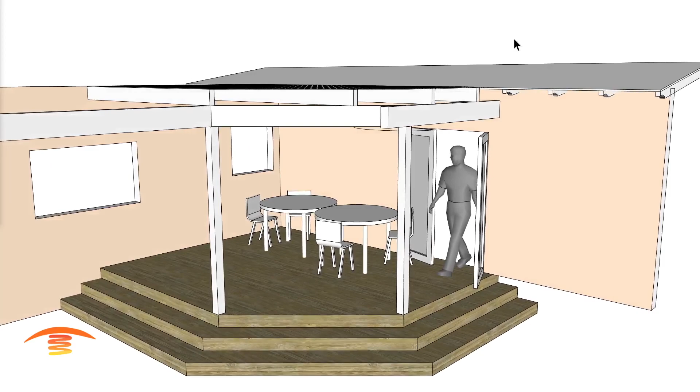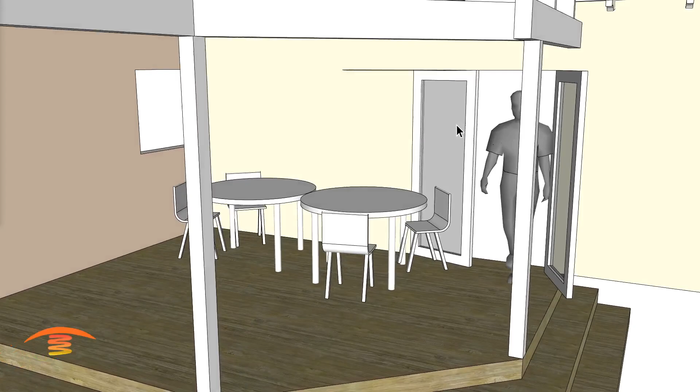So here we have a residential application. It's a raised deck patio. You can see they have some lattice work up here, and I don't see any issues with fans or anything of that nature. The only issue I see would be the doorway here, so I'm going to take the lattice off for a moment.

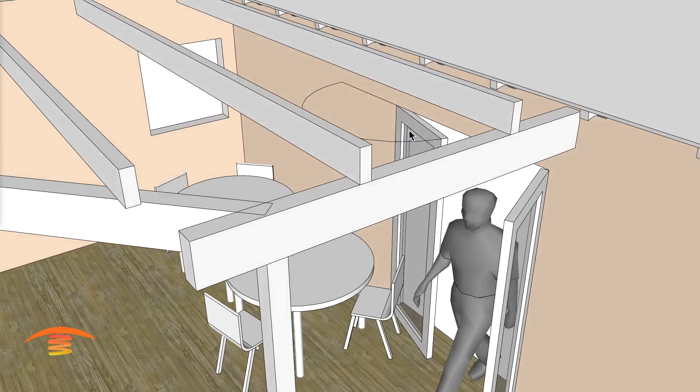You can see this doorway has the potential of opening up all the way. Now, I'm assuming this customer is not using this side of the door very often because of the setup here, but we still need to take that into consideration and use it as a guide. So I'm going to put the lattice back on.

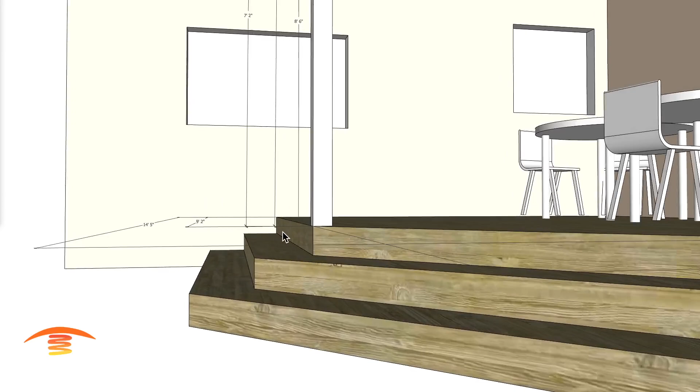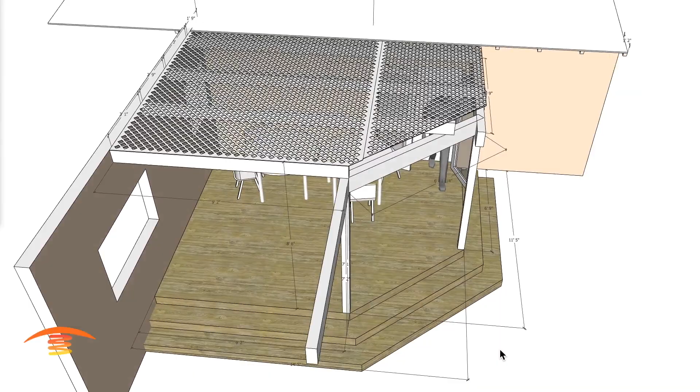Let's look at the dimensions of the patio. From the top portion of the deck there are a few different measurements, all going from that top edge. We have 7.2 to the lower beam, 7.11 to the top of that beam, 8.6 to the top of these cross members, and several other measurements, 9.2 over here. Overall dimensions are 14.5 and 11.5 in this direction.

We're going to cut off that measurement to determine how many units are needed. They also gave me some specifics about the beams coming across here, so you can see that.

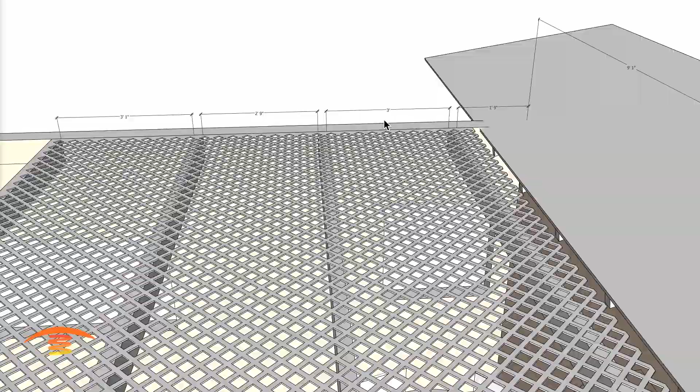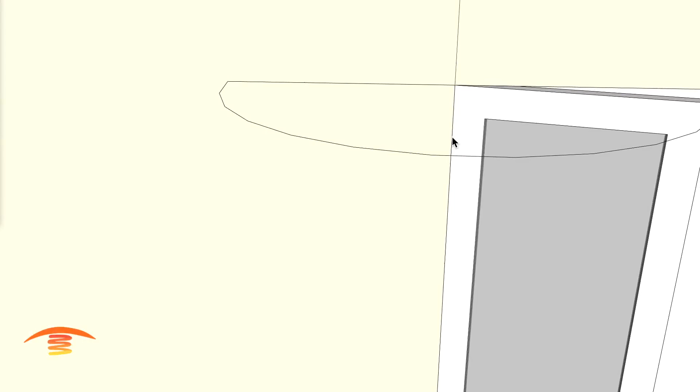This is what I have at the door, so this is going to be an important number for the customer to look at. I have 9 feet 1 inch to the trim of the door here, or actually this would be the hinge point of the door, so that should be enough.

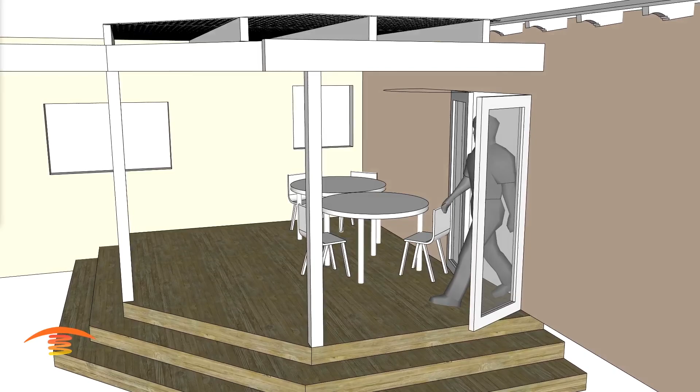Let me turn that off and look at what we could do. There are a couple of different heater plans here. This would be a Slimline 4,000 watt unit, and you can see I have it placed up here on the lattice. Now it's actually an inch lower, so what you'd do is take some tubular steel, mount it on this side, stretch it over to this side, and get a mounting position for that heater.

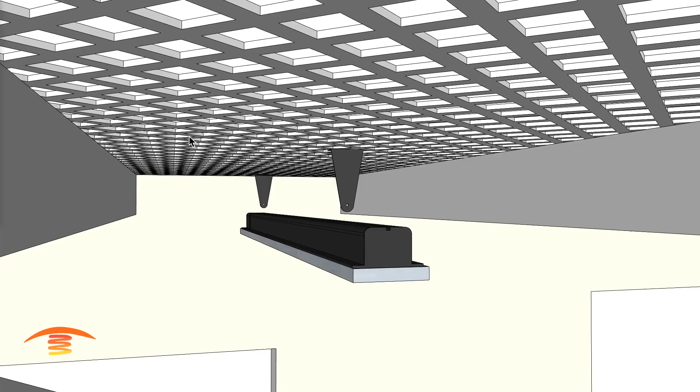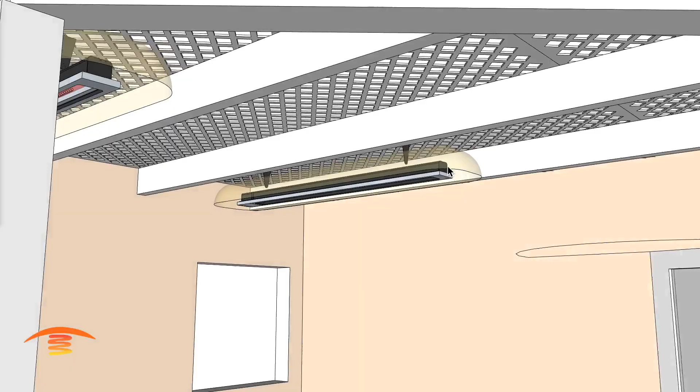If we look at the clearances above the heater, no problem there. We meet the clearances to this edge and this edge. The heaters are physically below this beam here, so everything else looks good.

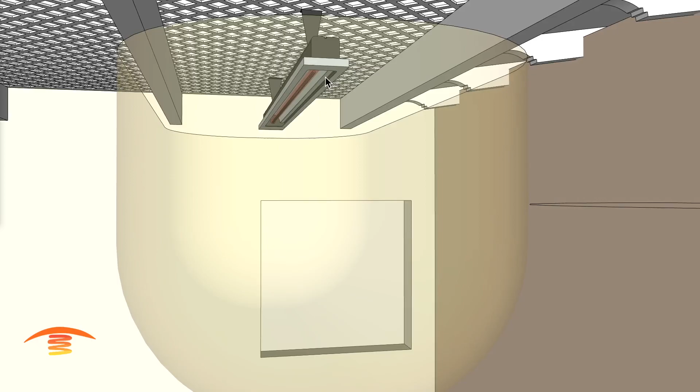Now the other clearance we're concerned about is the clearance below. With the position I have this heater, I'm meeting the clearance to this edge. I'm not sure if I have the dimensions to that specific spot, let me check... and I don't, so let me just add that in here real quick.

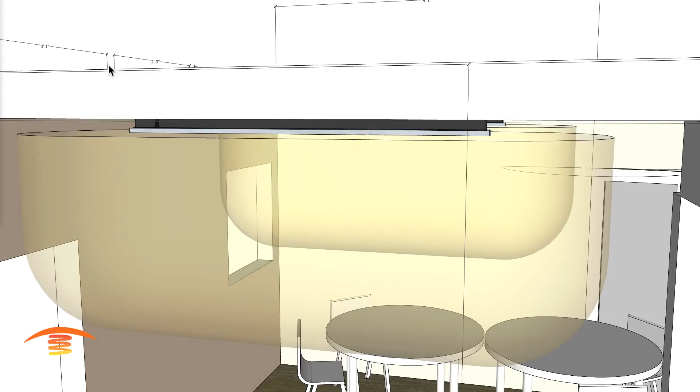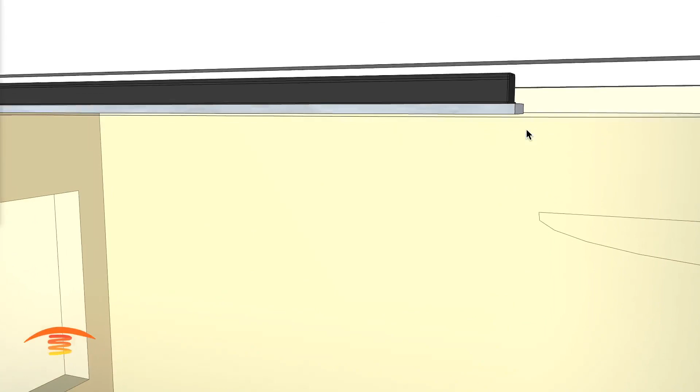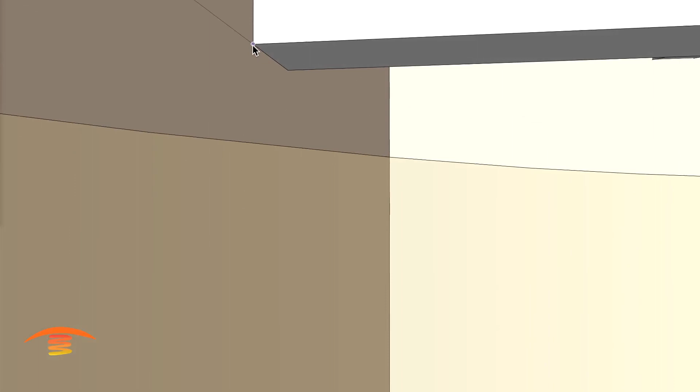So to that position, to the edge, let me key that in here. We'll tap right there and bring it over to the edge, or we could use this point right here and see what we get overall. Overall would be 6 feet 10 and a half inches. So with that, and the door measurement of 9 feet 1 inch still being true, there should be no issues with the clearance.

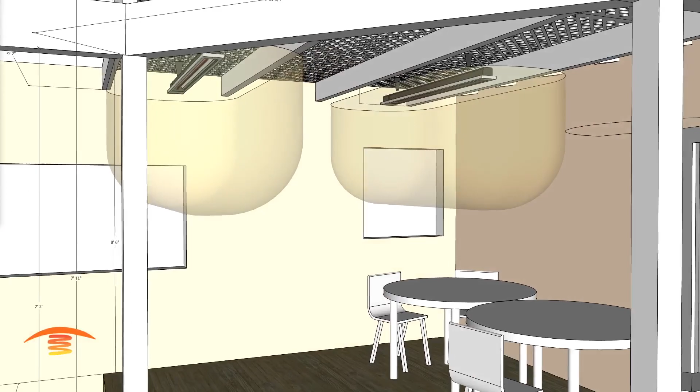If that is not true, you'll have to go to the second option I'll show you in a minute. In any case, basically there's two 4,000 watt units, and let's look at the footprint of the array.

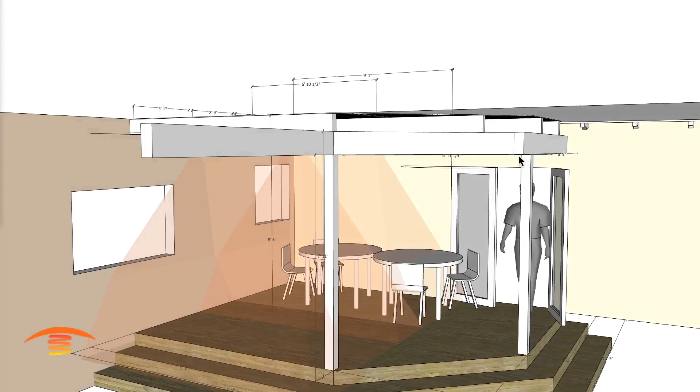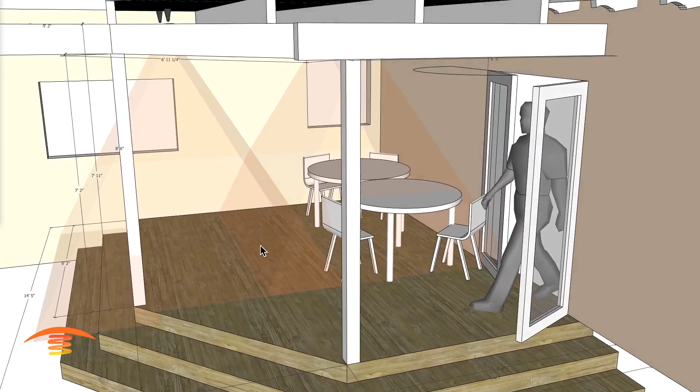I'm going to turn off the clearances here. So the footprint of the array covers this whole portion of the patio, but I'm not able to heat this section at all. If you're sitting in this chair, you won't receive the heat. This other chair is also questionable, so you'd have to change the seating pattern to stay warm on colder afternoons. But I think this customer has plenty of room to do that, so I'll leave it at that.

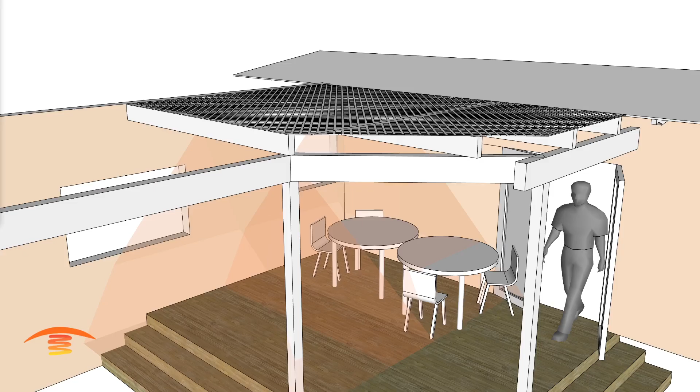Now, if that clearance or the 9 foot 1 inch dimension I mentioned wasn't correct, you could also go with an SL24 model. The SL24 is a smaller unit and will give you plenty of clearance. I have it all the way up to that edge, that same point, so I have more than 18 inches of clearance back here.

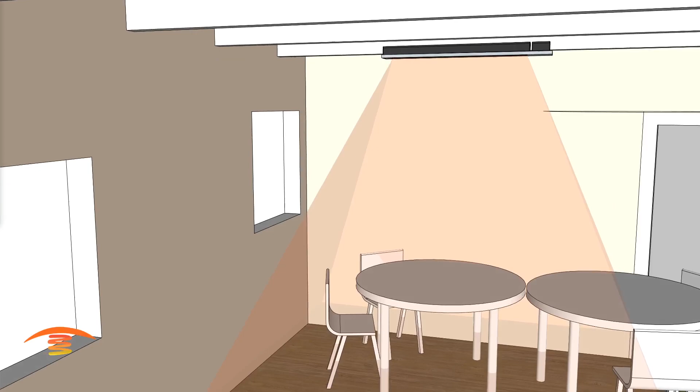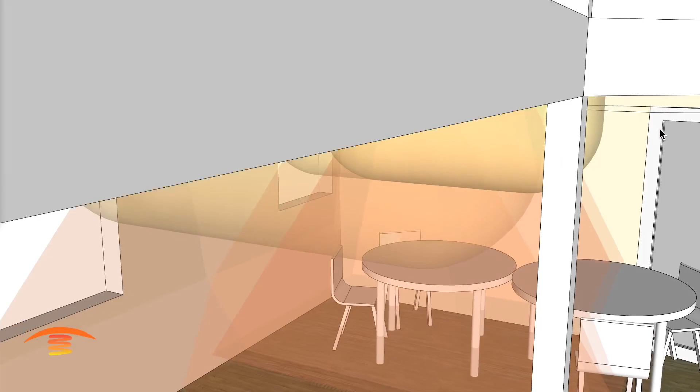I should probably point that out real quick, the electric heaters here need 18 inches of clearance. Actually it's more than that because I pushed it as far as I can over here, but you need a minimum of 18-inch clearance. Let's turn that clearance back on, you can see I have about an inch of play between that and the doorway over there.

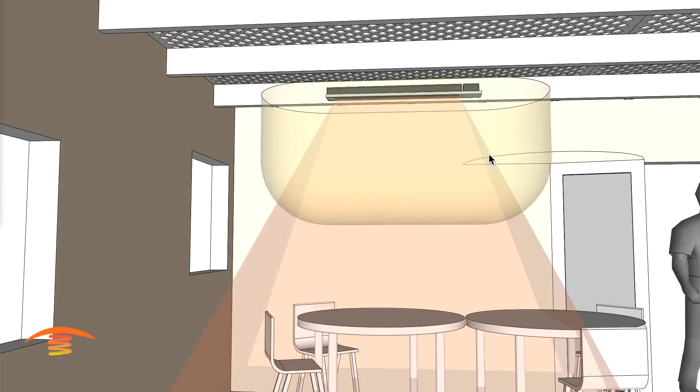We could also go with this 24 model Slimline, a 2400 watt unit. Again, we're able to push that back as needed, if we're not able to move a heater in there because of that doorway. So we can go quite a distance, 1.5 feet easily.

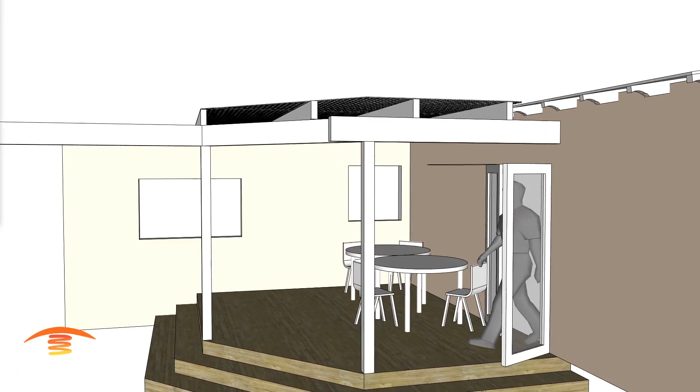But if we can, I would prefer to do the first application here. Turning that off, you can see there's plenty of coverage on this side of the patio.